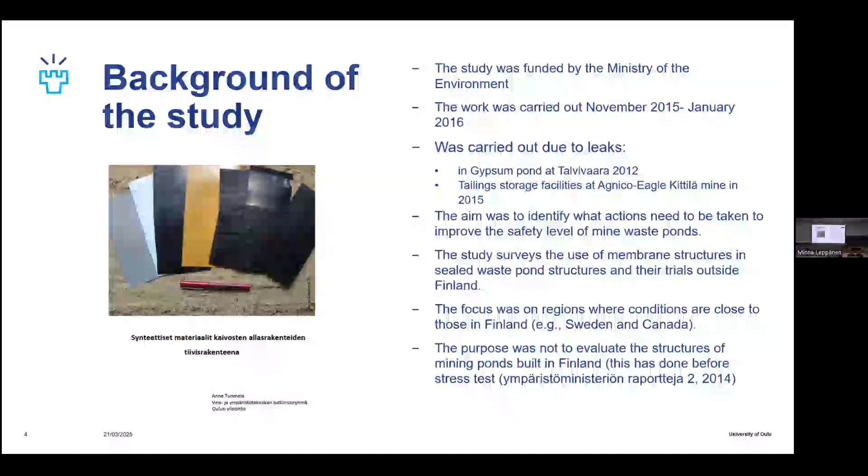But I went to work in the University of Oulu in 2012, and a couple of years went by, and then there were some things going on in the mine sector. We had some leaks, first in Talvivaara in 2012, and then in Kittilä in 2015, and then the Ministry of the Environment decided that we have to do something, and they started a study and asked the University of Oulu to make it, and I was the one who did that report, which you can see there.

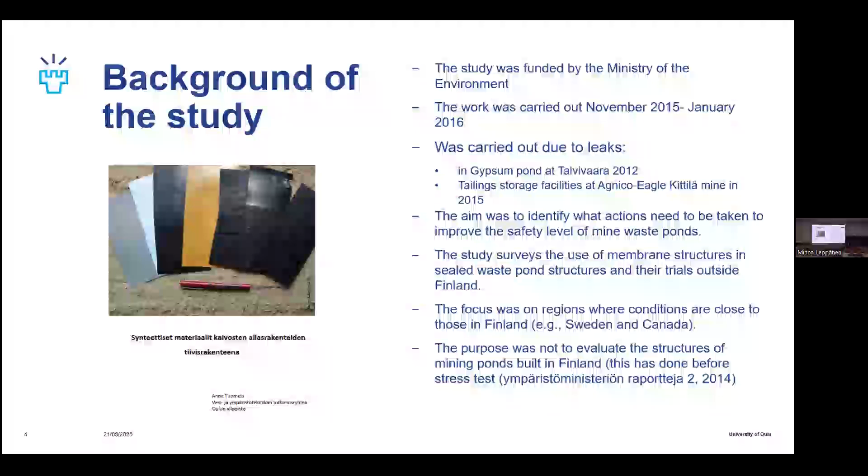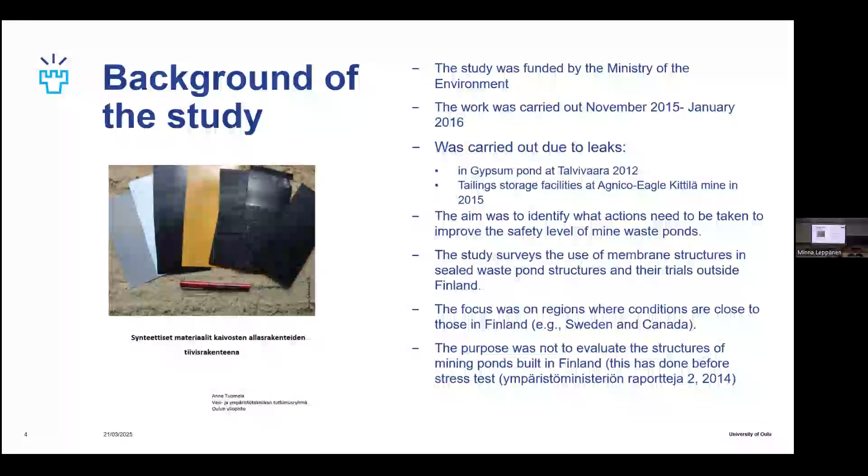It's only available in Finnish, but I decided that I would like to continue that work deeper, and I decided that it would be the first part of my PhD studies, which I had just started at that time. The aim was not to evaluate the structures of Finnish mining ponds, so that was out of the scope. The main scope was to know what is already known worldwide. So it was a review of articles which are reviewed, published and available for everyone. So I collected those and made a review of the knowledge that was available at that time.

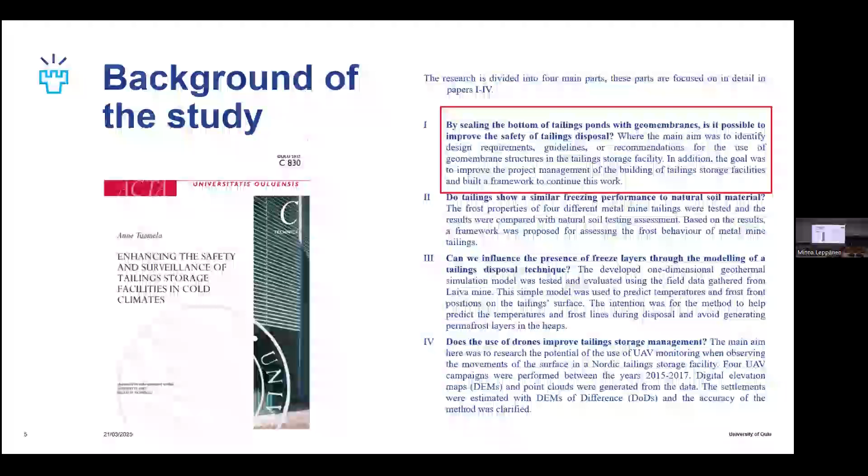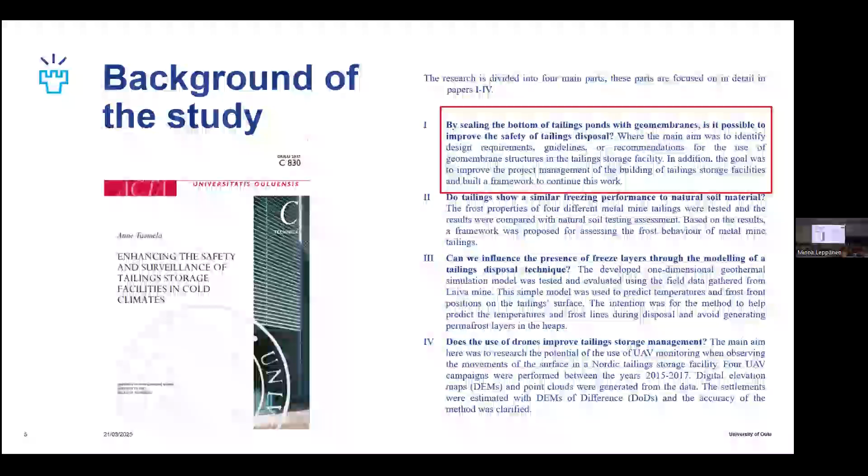So here is my dissertation theme, and it basically consists of 4 different areas, and one of them is based on that first report, but the publication I made later is a little bit broader. It's not only the review; we also added some project management things together with the

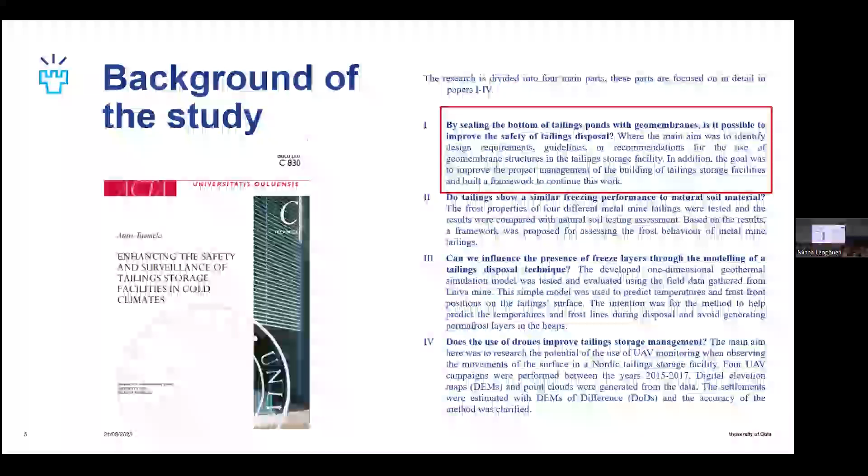technical requirements. And if I think of today's topics and the speeches we have heard now, I think management has been a little bit out of scope somehow. But in that paper we also went through what it means to improve the management in this kind of project when we are making a new tailings pond.

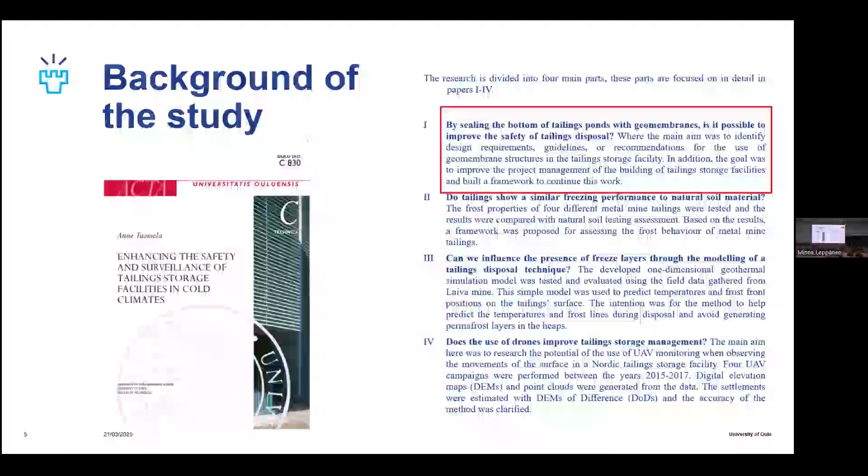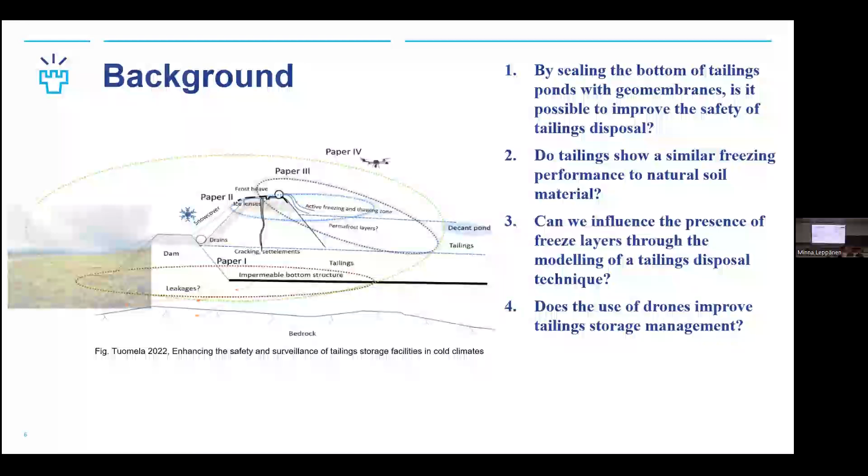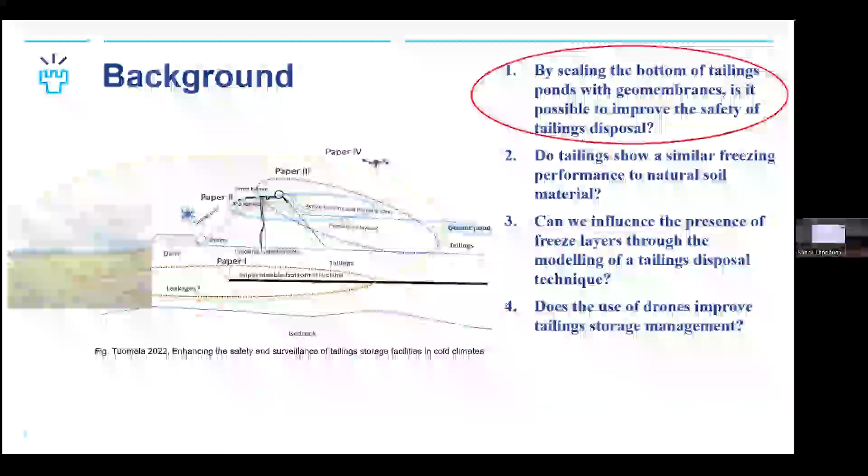Here's still a little bit of background about my dissertation. It consists of 4 different papers, and today we are speaking mostly about this first one: is it possible to improve safety of the tailings storage by doing impermeable geomembrane lined bottom structures?

And the other topics you can see there were more about the upper layers in a tailings pond, and what needs to be taken into account when we are working and operating in this kind of climate that we have. So we have snow, we have ice, we have a long winter here, and there are freezing and thawing cycles and everything everyone already knows.

And we have also had quite many years of laboratory work going on in our lab, and we have noticed that when we are doing measurements and trying to find out what kind of material tailings is, those normal laboratory measurements don't work all the time when there are tailings and some kind of effluent or other chemicals added. So, for example, the grain size can sometimes be difficult to determine if we are just doing it the same way as we do for natural material.

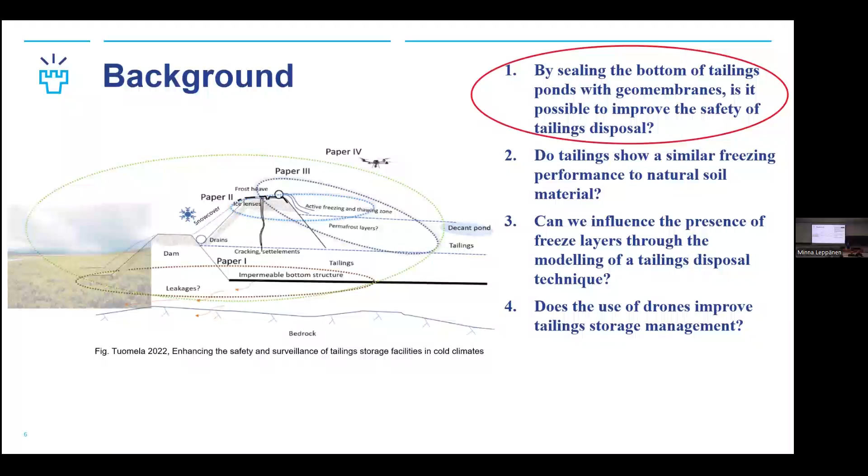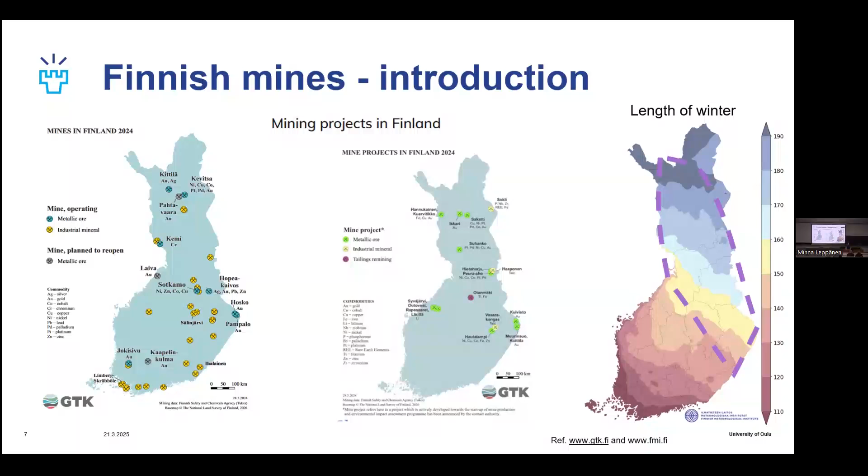So back to my first paper and review, which started in 2015, ended in 2020, and was published in 2021. Here is a link; you can go and check the whole thing if you are interested in what it includes. It has been divided into sections, and today we have talked mostly about section 3, the critical design factors for lined pond structures. And there are many references that our honorable Professor Rove and his research team have published.

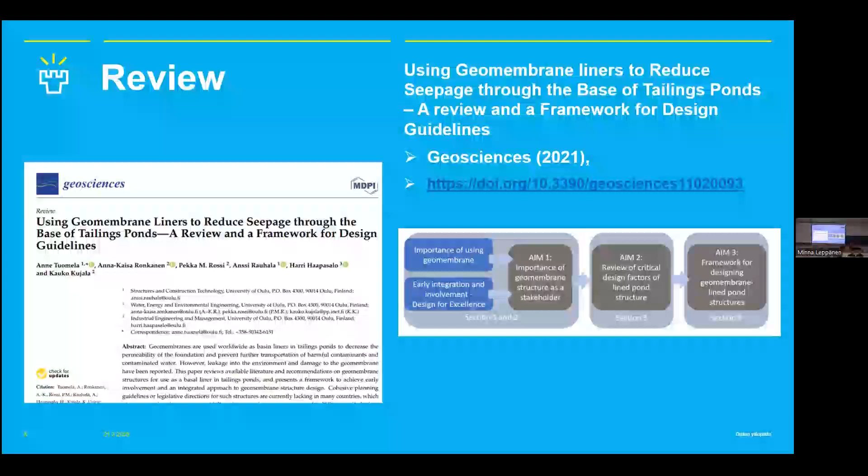But firstly, I checked where worldwide we can find similar or almost similar places where geomembranes are used, and I collected those and we put them on the map, and we checked: is there any similarity to Finland? Which areas have a similar climate? And we noticed, okay, not so many, but at least we had some first impression of the question: do those even exist at all?

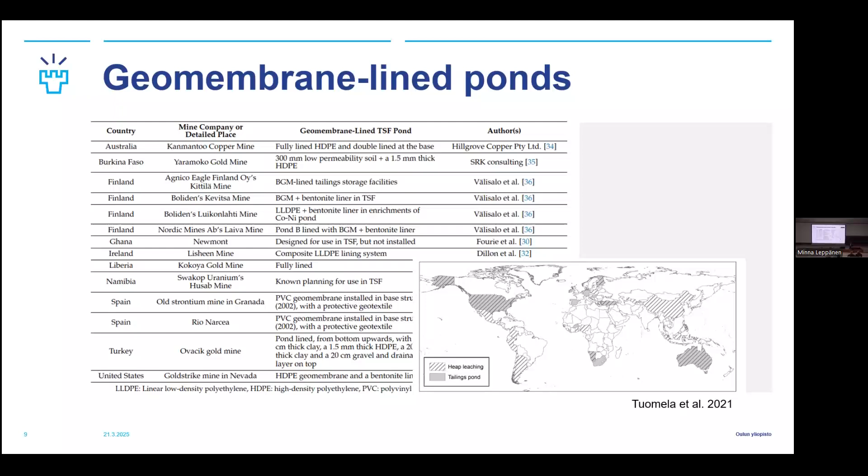So we noticed that those are quite widely used, and there is experience already available. Of course, there is also heap leaching, which is somewhat different from tailings storage, but there are still some similarities, and of course some structure examples and how those structures have worked.

So first, up here are some typical cross sections of our tailings ponds. They are not taken from any certain place; this is a general one, and as we can see, lately the most typical way has been to use the slurry technique. Of course, nowadays we are heading to more sophisticated ways, but at that time it was the most typical. I'm sure that if those mine areas now under planning are started, the system will change from this.

But the main idea is that we have to make impermeable foundations for the ponds here, so that we avoid everything leaching in this direction. We want to collect all the waters stored there in a safe way, so that failures do not happen there. Also in the dams' case.

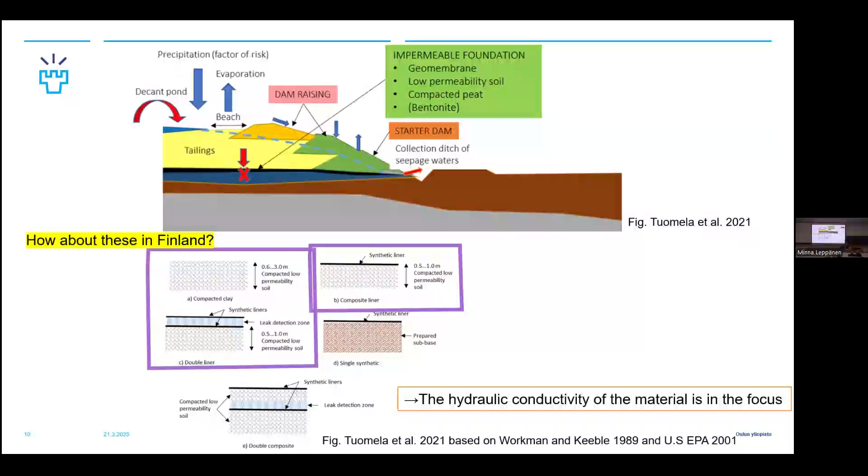So I noticed when I started to make this presentation two days ago that nowadays there is a limitation to see any structure from the mine area. So even though I tried to find some real structures from Finnish mine areas, I couldn't find those. So probably I should contact the authorities and ask them to send me Finnish mining structures, pond structures, but I didn't have time for that. So I made those really simple layouts by myself.

But now the point is that in Finland, in a case where the tailings is not so harmful, or we are thinking that it's not so harmful, it's very general that tailings is disposed on peat. And why we are using peat is because it's naturally there. So we have lots of areas where there is peat. Our most typical natural material is moraine. So that's why we are using, of course, peat and moraine, because those are available in the mine areas.

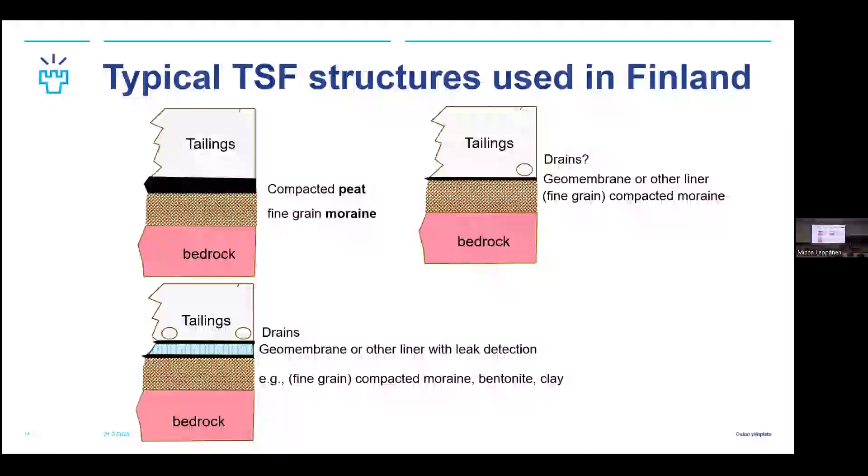Then some notes on what we have faced when we have done our research. Because we are mostly talking now about the k values and things which are affecting those, measuring has been noticed to be very challenging. So here's one picture from our laboratory where we are measuring k values, and we have noticed that there are lots of challenges. When we are doing those things in the laboratory, everything works well, but when we are doing something in the field, it's a lot more complicated.

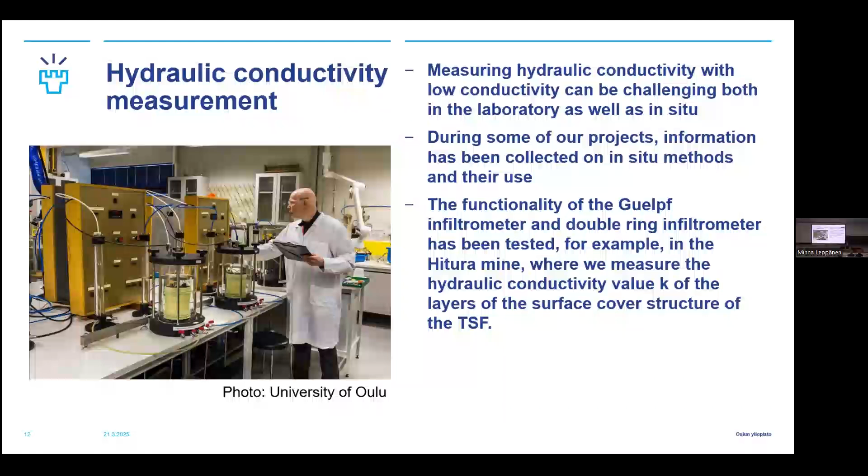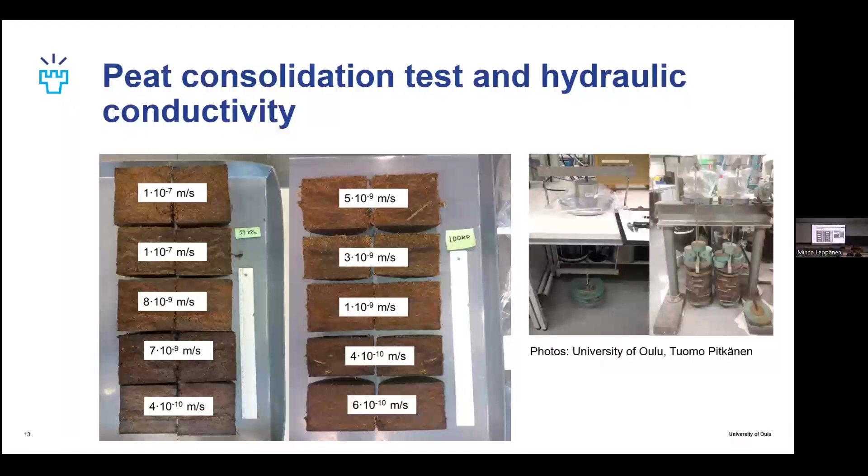We have had one diploma thesis done some couple of years ago, where we measured moraine's hydraulic conductivity in situ, and also we made the laboratory tests and measurements for the same material. And we noticed that also in laboratory work it was quite a challenging material to be tested, and similar things were noticed when we tried to measure those k values in the field.

So compaction rate is all the time affecting, and if you are thinking of the laboratory, we can do a small sample and compact it very well and properly there. But when we are thinking about huge tailings storage facilities, how can we be sure that the compaction rate stays all the time at a very good rate?

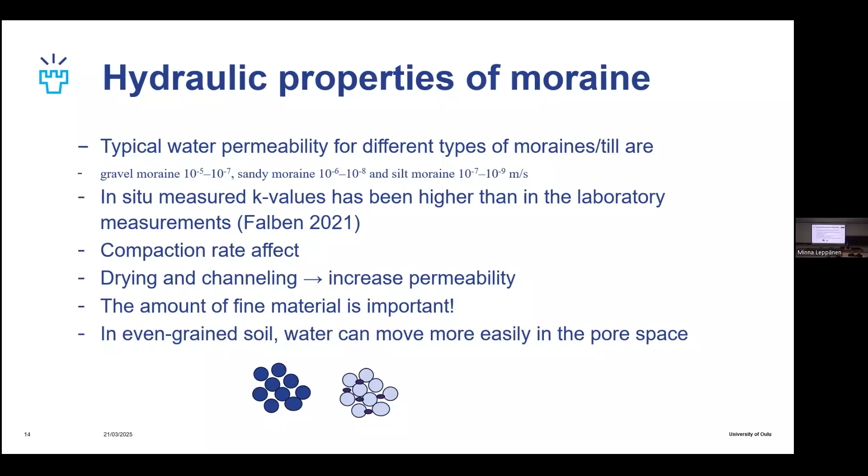So why I was showing this and telling about it is that we have also noticed that authorities normally demand those hydraulic measurements to be done also in the field. And normally when we are applying for our permits, those material tests are done in the laboratory. So we have to understand that there are differences between those measurements. There are many ways to do those, and many things affect the values we will get.

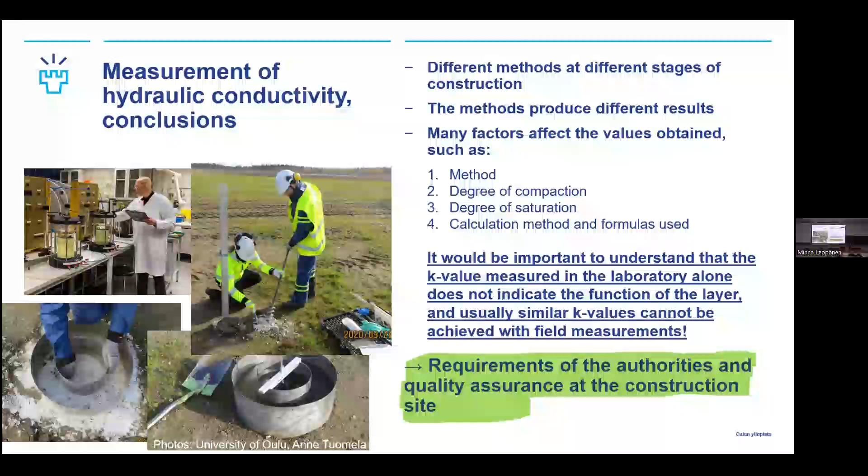And as a summary, maybe I'll try to summarize the whole day already, even though there is one more presentation coming. Based on the literature review I have made, geomembrane lined structures are widely used in mining construction, and if we make those calculations as we have seen, we can decrease the seepage water by using very well installed and constructed structures. So those play a very huge role in how our structure is designed, but not only that, how it is constructed and checked that everything is fine.

Of course, there are costs and economy on the other hand, but I have made some points in my memo that I have noticed our youngsters are wiser than we are. Nowadays they already want to buy, for example, a car which is produced in a sustainable way. So probably this will change over time, and the next generation will want to pay more to get minerals and materials which have been produced in a sustainable and safe way. I believe that.

I also have some ideas: why are we thinking all the time about how tailings should be disposed of in a sustainable way, and why are we not thinking how to take those harmful contaminants away from the tailings before we even dispose of that material at all? Maybe that is a stupid question, but if someone can answer me, I'd like to hear it. Probably it's the cost, but is that the only reason?

Then there are also some other things. Of course, we have already heard that climate change affects, and that has to be taken into account as well. And if we change the purpose of the pond during its life cycle, we have to go through almost the whole process again. Even if the pond is already there, is it safe to just switch its purpose? And do we understand the consequences if we change that system?

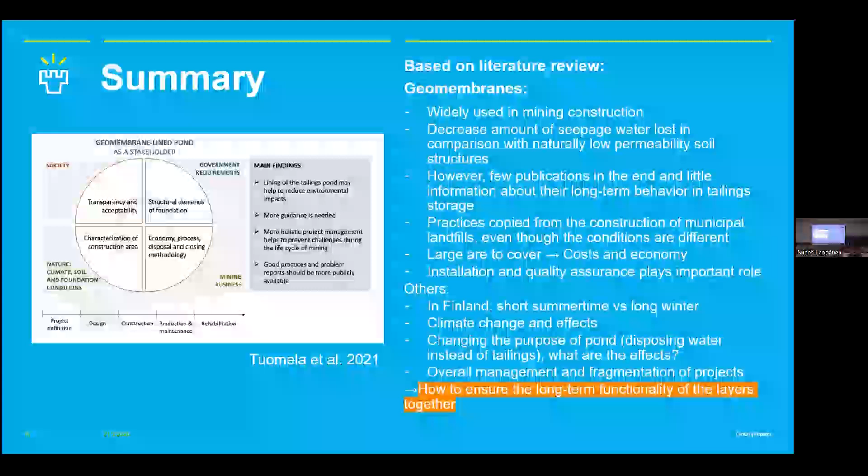Professor Rowe already answered how we can ensure the long-term functionality of the layers together, but still I'm wondering whether it is possible to show that in laboratory facilities, making the tests quicker, and then thinking what the situation will be after 150 years, what will happen then to the disposal area. I'm wondering about that. And did I forget something else?

Here is a summary from my first published paper, where we consider the geomembrane lined pond as a stakeholder, and as I wanted to say at the end, maybe someone is thinking how I can say that a geomembrane pond can be a stakeholder.

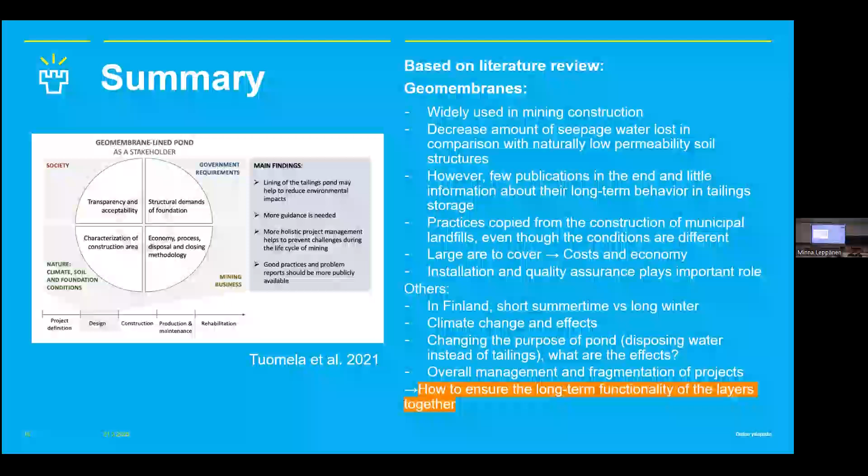That was the main lesson I got from the project management professor when we collaborated on that article: we normally think too narrowly about project management and the stakeholders affecting this kind of very complex project. So we should broaden our minds and focus on what is maybe the most harmful, or the main thing in the project, not only the people or persons. We can put, for example, in this case, tailings ponds in the center of the whole project.